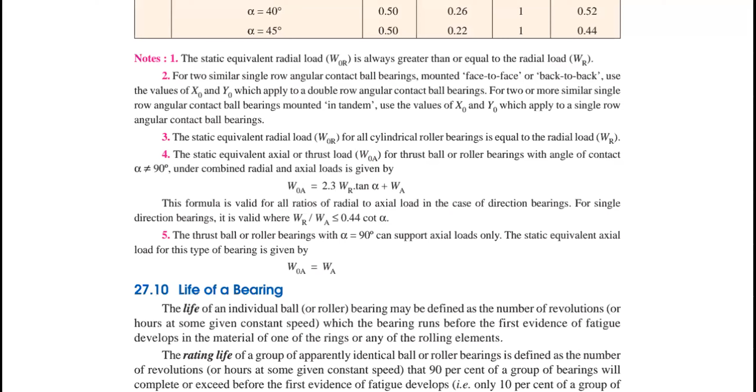And again, we are having some classifications in case of ball bearings and roller bearings. Now in this class, we try to design the bearing based on different considerations. We also try to discuss the design procedure of a rolling contact bearing, the important design procedure steps, like the sliding contact bearing. Before that, we have to discuss an important one: what is the life of a bearing.

This is a very important definition. Why? Because what is the purpose of a bearing? It has to support the moving element or rotating element. Now for the life of a bearing, you have to estimate how many cycles it is supposed to sustain. This depends upon the type of application and the type of loading conditions, because the life has to be estimated based on the type of loading condition.

Whenever your load is more, automatically your life will be decreased, obviously. So we have to know the load-life relationship while designing a bearing. That is a very important aspect. Now, how do you decide the life of a bearing? That is a very important point, because most numerical problems are based on this life of bearing.

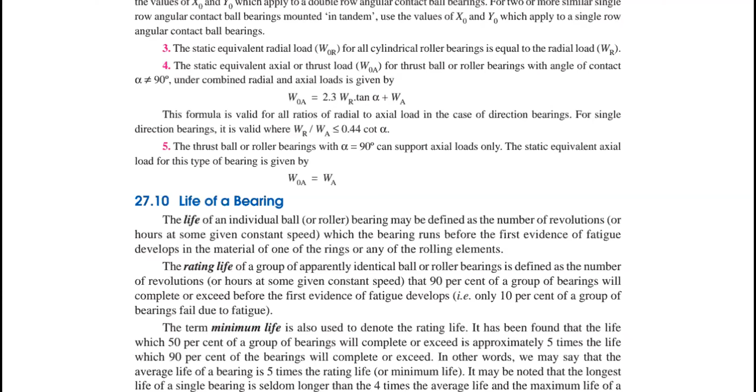This is the standard relation. So you have to remember whenever you are having a problem, L50 equals 5 times L10. This relation is based on the probability and statistics relations we had in previous classes. Direct relation we are using. So these 3 are very important relations, especially while solving problems. I hope you understand this life of the bearing. First one is the life of the bearing: how you estimate the life, what is the life of bearing. Second one is what is the rated life.

Suppose you are having a group of many bearings, so in that particular case you can estimate your bearing based on the percentage. At least 90% of the bearings make revolutions without any failure. That is what we call the rated life. And the last one is average life or minimum life. In average life, at least 50% of your bearings make revolutions without any fatigue failure. Fatigue means the point where we can identify the first fatigue crack that appears on your bearing. That is what we call fatigue, right?

Right. Now we are having different kinds of relationships. I already told you that.

So still a number of people are entering, Amma. Right, no problem. Okay.

So we are having a load life relationship. This relationship is purely based on your rated load and your load carrying capacities. Okay, we will move on further. You can easily understand what the relations are.

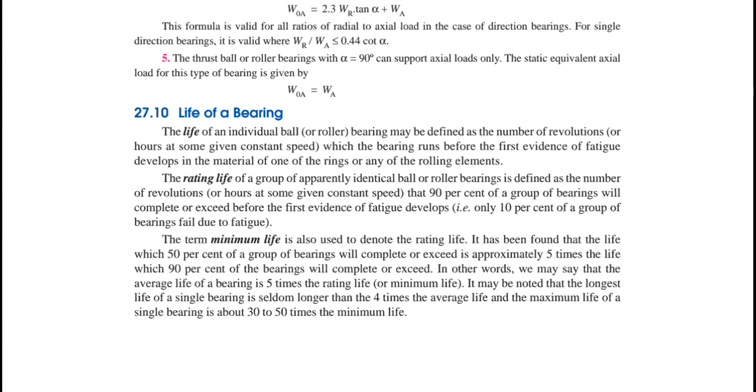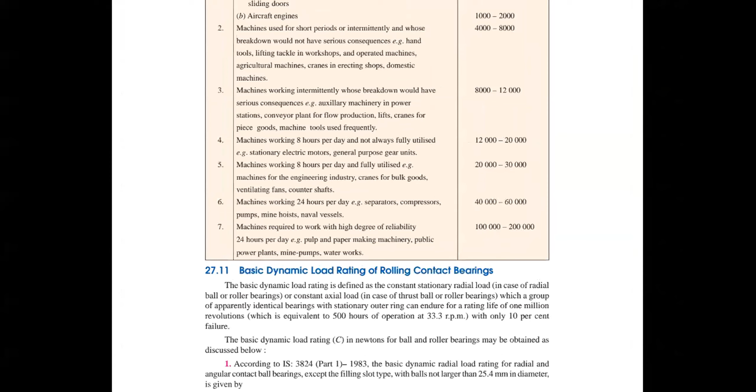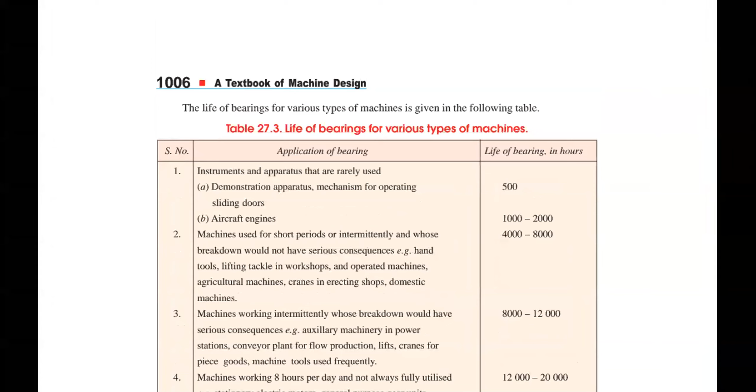Right. So here you please observe a table. Here the life of bearings of various types of machines are given. You can easily observe application of the bearing and life of the bearing in hours. Just simply have to observe. No need to read or all those things.

Simply, first one is instruments and apparatus; based on those you are having 500. And aircraft engines and machines used for short periods. A machine working intermittently, 8,000 to 12,000. All these things you will observe in your data book also. Whenever you are having problems, you can select life of bearings from a data book. You can easily calculate it based on the relation also, right?

So just for a while, you please go through this table and observe the values. Why I am saying observe the values is so that while you are referring to your data book, you can easily recollect. That is the reason why I am showing tables. There is no need of showing tables because all those things are available in your data book. But I am showing them simply in order to recollect, while you are solving problems, where it is actually available or what is the terminology.

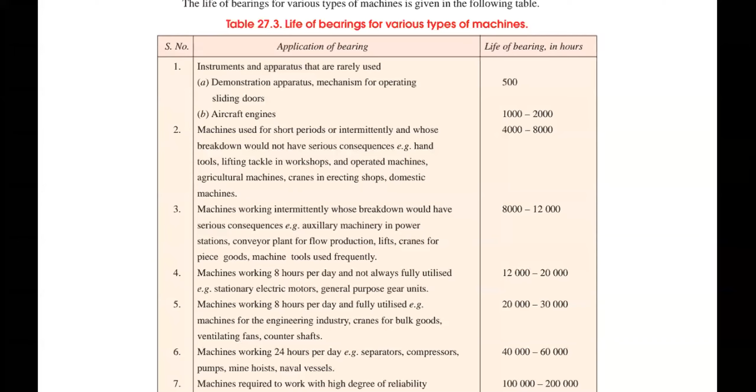In the last class also I showed what is the viscosity, what is Zn by P and what is C by D ratio, all those things. So based on that, whenever you are having a problem you directly refer that particular point. So it is very, very easy for you. If not, it is very, very difficult. What is Z, what is N, what is P? Based on those discussions only your time will be over. Right. You have to observe all those things that are available in this table.

Second thing, you are having one relation. You please observe this relation. No need to copy or all those things. Simply observe this relation, that is sufficient. So here you are having a basic dynamic load rating of a rolling contact bearing. Whenever you are having a constant stationary radial load, meaning radial ball bearings or roller bearings, or an axial load, meaning thrust ball bearings, which apparently identical bearings with the stationary outer ring can endure for a rating life of 1 million revolutions.

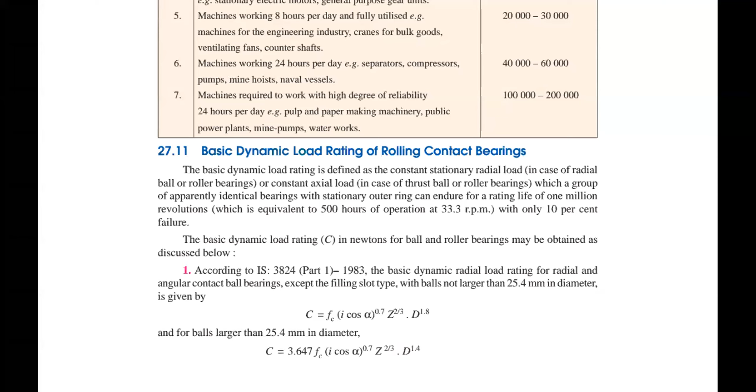See, static loading means there is no loading condition. Dynamic loading condition means you are having some loading condition, right? With only 10% of the failure. That is very, very important. Right. So here is your relation. Please observe the relation, that is sufficient. All these things are available in your data book. No need to worry. Just know the formula and know the relation, that is sufficient.

I hope you are already observing C equal to fc (i cos alpha) power 0.7, Z power 2/3, D power 1.8. And for balls larger than 25.4 mm in diameter, C equal to 3.647 fc (i cos alpha) power 0.7, Z power 2/3, and D power 1.4. Right? So please don't mistake me, I'm simply reading the formula. Those are the formulas, but here no need to remember. You have to apply those formulas. You have to read them out. There is no other way. Right?

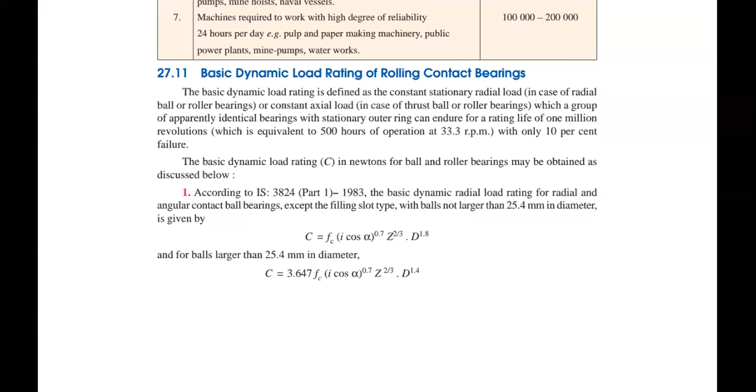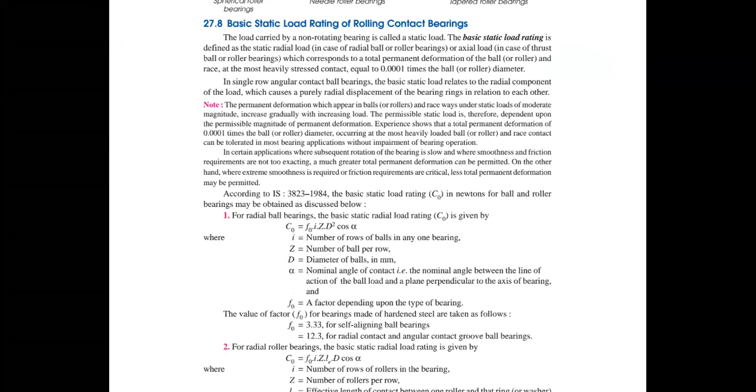Right. So these are other formulas you are having. So again, you are having a basic static load. In the previous slide, we were going only to dynamic load. Here it is static loading. Static load means here for a radial ball bearing, C naught equal to f naught i Z D squared cos alpha. Right. So C naught is the static load rating. So here the terminology is very, very important. C naught is the static load rating.

So in textbooks the notations vary. They are using P or they are using Q, or some other notation. But the terminology is same; notation is different. That is the reason why you please read once on your screen. Right? What is available? What is static load rating, right?

What is F naught, what is Z, what is D square, what is cos alpha - all those things are available on your screen, just you have to go through it. Keep mentioning that while solving the problem, definitely you will face problems if you don't understand the exact meaning of this terminology. Terminology is very, very important rather than notation. Whatever the notation it is, you don't bother about those things. Just simply understand the terminology.

What is load? Load means P or F, there is no difference, right? What is pressure? Pressure means P or some other notation, there is no difference. Textbook to textbook, the notation will vary, but the terminology is the same. That is the reason why I keep saying this point.

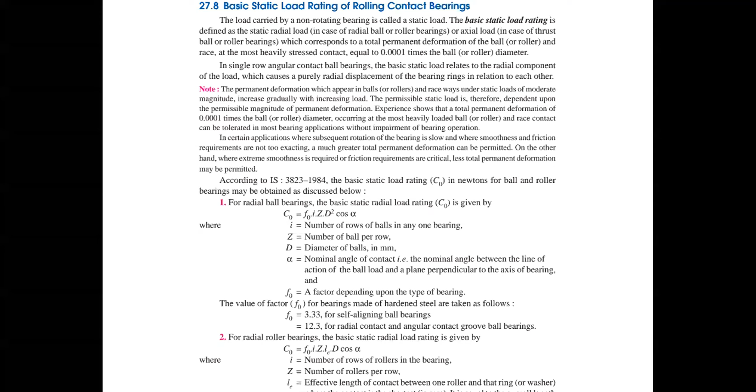So if you observe these things, simply I have to move for the further ones. Directly I have to explain some of the basic design procedure for your selection of a bearing. Just simply I have to explain one by one. Just you have to pay attention, simply pay attention.

So what is the selection of a bearing, especially in case of a rolling contact bearing? The first and foremost step of selection - because the selection procedure is different from textbook to textbook - but I have to pick some important points, that is the reason why I am explaining on my own. Please pay attention, otherwise simply note down on your notebook, no problem. These are the standard procedure you have to follow.

So the first and very, very important point is: calculate the radial and axial forces acting on the bearing, and determine the diameter of the shaft, where the bearing is to be fitted. Am I clear? So first one is you have to calculate the radial and axial force.

I already told you that a bearing has to sustain both radial loading condition and axial loading condition. That is the reason you have one relation - I will show you while solving a problem. Before solving the problems, I will give almost all the relations. One relation is P equal to X into FR plus Y into FA, something like that - you're having this formula. These formulas are applicable for both radial load and axial loading condition. Whenever you have a ball bearing, it is to be sustained for both radial loading condition and axial loading condition, except when it is designed only for axial loading condition.

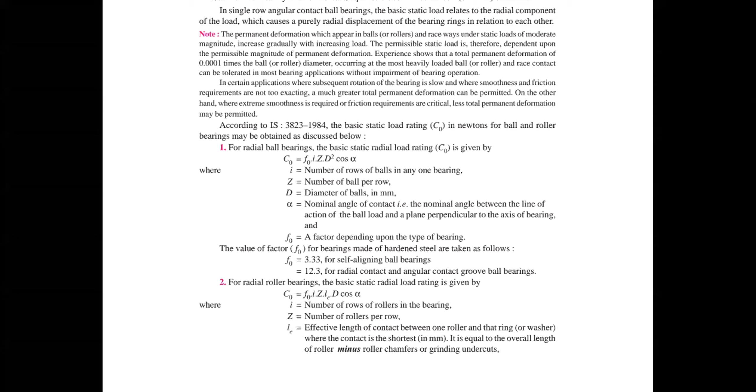Next point is you can calculate the dynamic load, equivalent dynamic load for a given relation. Already I mentioned the relation, some P or W, whatever it is. Some other textbooks mention P, some other textbooks mention W. So P equal to X into FR plus Y into FA. Already you have this relation, so please go through the relation.

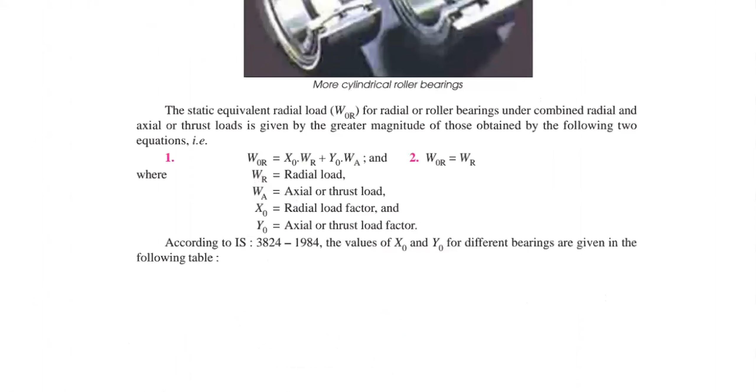So equivalent load, you can say that W equal to X into FR plus Y into WA. So X is the radial load factor, X and Y are the factors somehow, R is the radial load and A is the axial load. Likewise we have this relation, so based on that relation you can calculate the dynamic load.

So I clearly mention that dynamic load means at least you have to make 1 million revolutions. Otherwise, you can say that it is a static loading.

Next, make a decision about the expected bearing life. And the next thing is, after calculating all those things, whether it is a radial loading condition, axial loading condition, and what type of load it is, whether static loading condition or dynamic loading condition, then according to that, you can make a decision of the life cycle of your bearing.

Life cycle of your bearing. You have to make a decision on the life cycle of a bearing, and also you can calculate the load carrying capacity of that particular bearing. And the last one is you have to check whether the selected bearing of the series has the required dynamic capacity or not. So after completion of all those things, you complete the entire design procedure of your bearing.